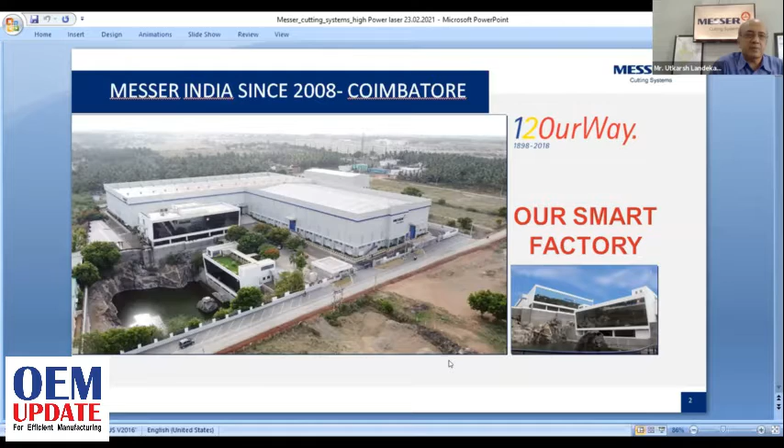So coming back to our initiative of our country, wherein we are talking about being vocal about localization, we are trying to make more and more indigenous content, wherein the key technology still comes from abroad, but it has to be used for local domestic purpose. So going back to the history of laser cutting, they invented the laser in 1970, and thereafter, with various development, in 2018 the fifth generation of machine was launched, and this equipment is one of the fast selling machines for us in India, as well as we are also exporting.

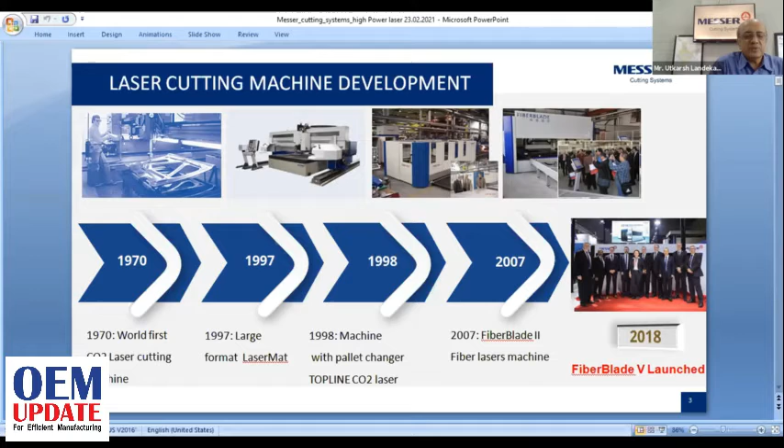So the concept is that when we build a machine for India, we are only talking of a quality machine which is acceptable locally as well as globally. So the local companies which buy this equipment want themselves to be positioned against competing global companies, and these equipments have to adhere to all industrial norms. When I go to the future slides, you'll understand what exactly I mean.

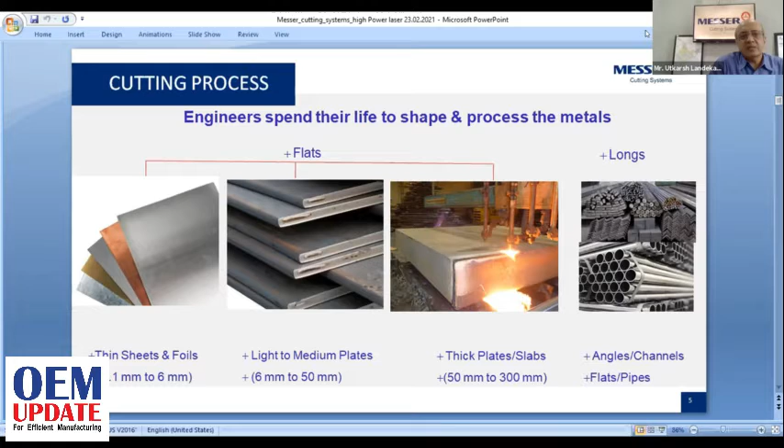Engineers generally spend their full life in shaping the material, and these materials are in two forms which are developed in metals, like flats and longs. Flats means it can be thin sheets, it can be light to medium plate, it can be thicker plate, these can be slabs, angle channels, and they are the long members. So we will be processing this material with laser, gas cutting, and plasma. So the process of laser, plasma, and oxyfuel, they have their own bubble area of operation when it comes to precision as well as the thickness. So this is our universal diagram which we discuss with each of our customers for all the applications.

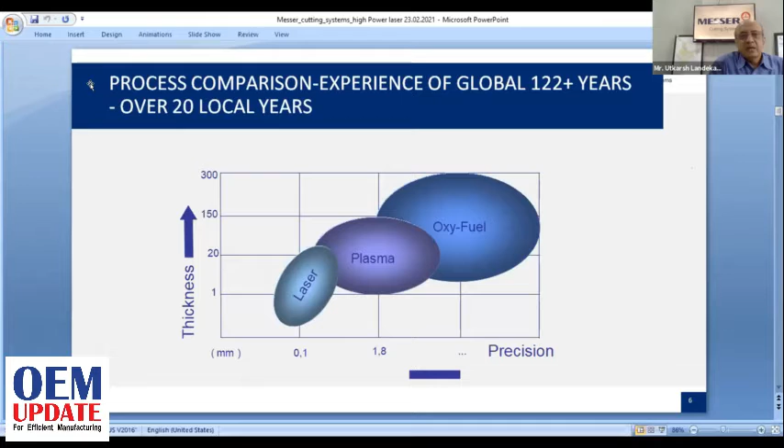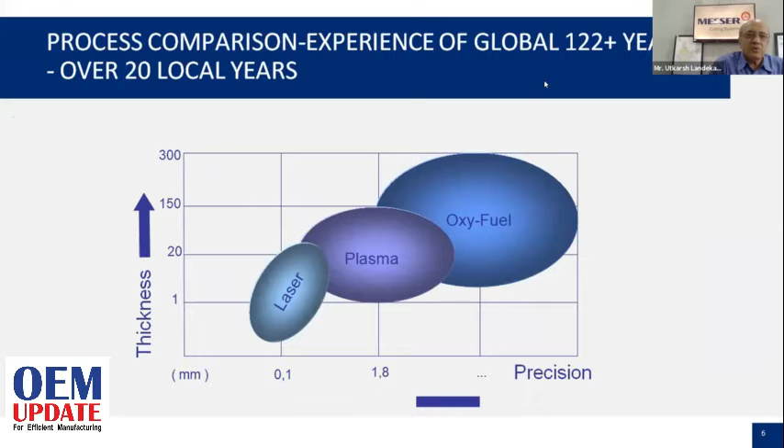So when it comes to the higher precision and material up to 25 millimeter, which has been the predominant area of laser, then it is followed by the lesser precision area of plasma, however the material thickness range goes from 1 millimeter to 150 millimeter, and oxyfuel goes from 6 millimeter until 300 millimeter. So when we look at this bubble diagram, which is a very important diagram, when we go through the application, you will realize the utility of this diagram, and there will be a lot of overlapping area where we have to take a conscious decision that we have to be competitive locally as well as globally with this.

The cutting can be straight cutting for gas cutting, plasma, laser, as well as it can be chamfering. Now globally, when you travel across several countries where the edge preparation or the chamfering is being used for shaping the material as well as welding, all the three processes should be capable of cutting straight as well as beveling.

So in laser also we have developed the bevel, and in plasma our bevels are already being used for several jobs for normal industry as well as defense industry, and they are very handy tools, or you can say they are very productive tools, wherein the reprocessing of the material at various stations can be avoided by adopting these 5-axis tools.

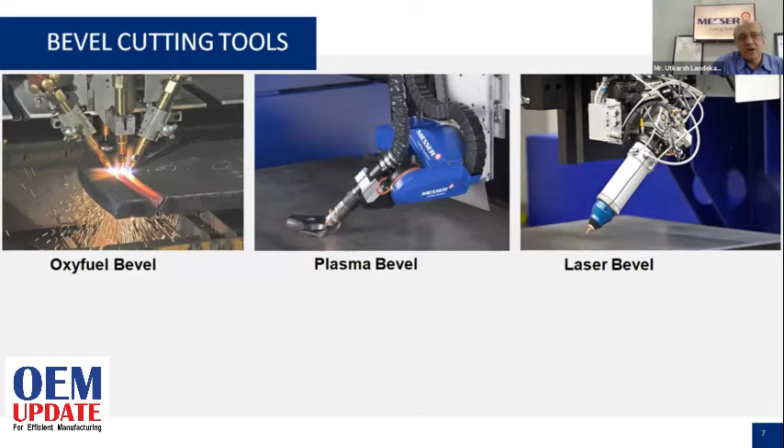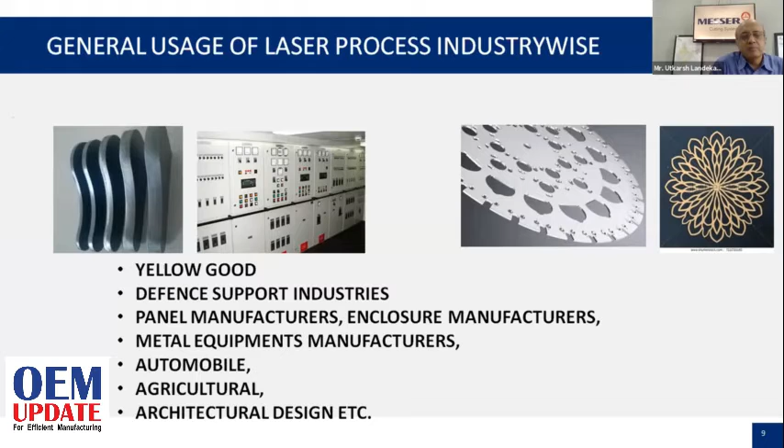So when it comes to laser as an application, these applications are in yellow goods, defense support industries, panel manufacturing, enclosure manufacturing, metal equipment manufacture, automobile, agricultural, architectural design. Now, when we say that we are talking of all the local production for our own use, we need all these equipments to run the show in the industries as well as in the infrastructure segment, as well as all of this what I have highlighted are forming major components which are being used by the defense industry.

So when we become vocal for local, what is important is the machines can be suitable for global materials, global standards, but that may work, may not work in the country. So in our Coimbatore factory, our main endeavor is to work upon the local materials, local steels available, the way the material is available, maybe it is in some particular form, that has to be cut.

The laser cutting machines which are available in the market are mainly coming from the first world countries. They are designed for the first world country material, which are very sophisticated, but in our country they may not be so sophisticated. So we need to tune up the brain, that is a CNC controller, to take out the production in the lowest preparation time, so you don't have to prepare the material ready to get operated on this machine and cut parts out of it.

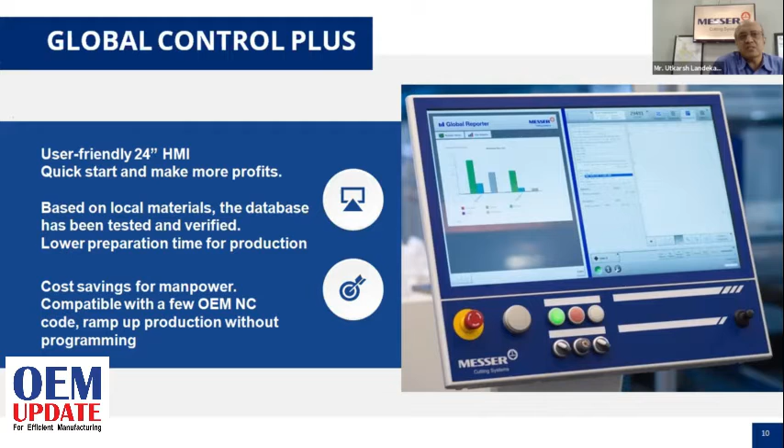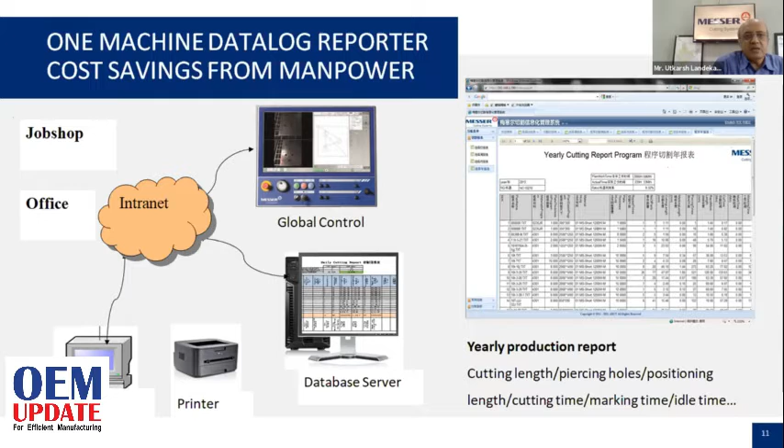Today we are talking of digital India, so cloud based computing. There are systems which are monitoring the equipment, the database is done through cloud computing, and the entire machine production has to be seen from either India, or if it is an MNC company, the data should be available overseas, or if these are Indian companies running their factories in other countries, they should be able to monitor it here. So the equipments, laser cutting equipment, plasma cutting equipment, whatever we are building here are capable of doing this task also. So we want our local internet infrastructure also to support such processes.

Primary sources of gases in India are oxygen, nitrogen, and air, which are being used. Now, there is a typical case wherein, in the COVID situation, the oxygen shortage is there. So we have to tune up the machine to start cutting in air, which is available from a normal compressor, and you can still produce the parts with these available gases.

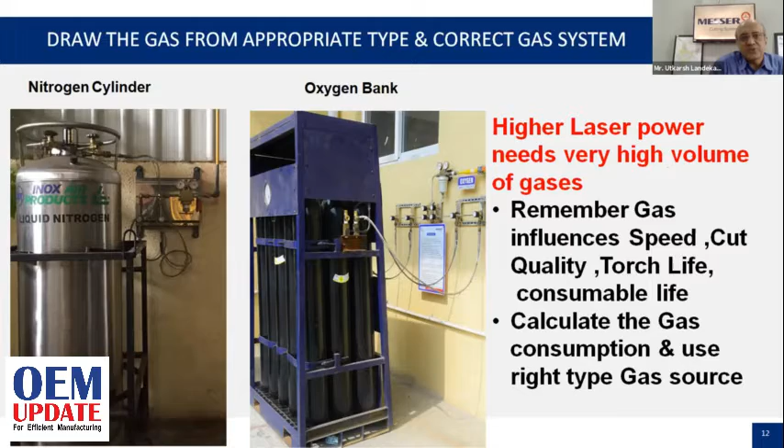So when you cut with higher laser power, you require higher volume of gases, and then you have to be ready to use the local variety of gas, local purities, and local supply shapes. So if you see on the screen, there are two different shapes. It's a cryocan or it is a standard cylinder. So the machine should be capable to adapt with this system. And we have systems to make those gas supply units capable to feed the gases to the machine to produce it.

We also advise our customers to control the cost at various locations. So what can get measured can also get improved. So there are various avenues of saving that can happen. It may be consumable cost, it may be the yield calculation, it can be lower cost of manpower, or it can be capital cost also. So we work with our customers to minimize the cost or optimize the cost and still get the best output.

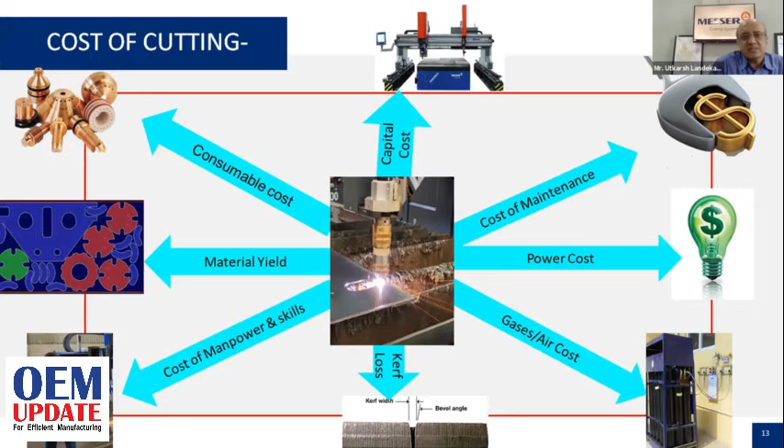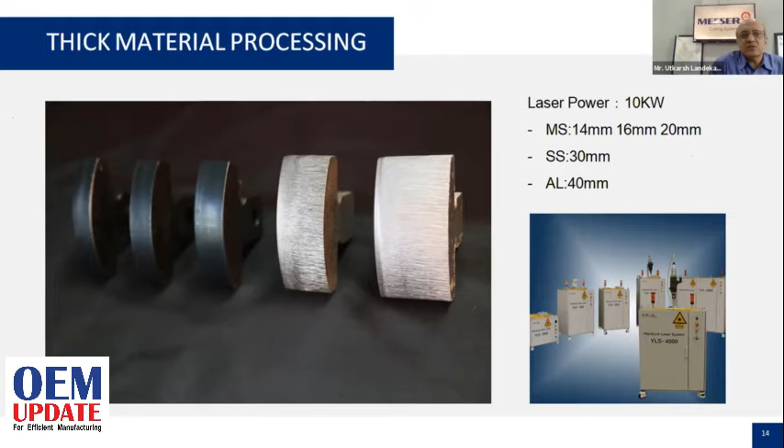Now coming to the thicker metal processing, which has been the predominant area of plasma cutting, gas cutting, or maybe other machining processes like router, milling. So now with the laser power going up and the prices per kilowatt coming down, more and more materials are getting shifted to laser cutting. So what we have seen in the industry, a shearing process, turret punch press, drilling, then milling, and some of the cutting processes are getting shifted to laser cutting. So the components are directly formed from the plate instead of other materials.

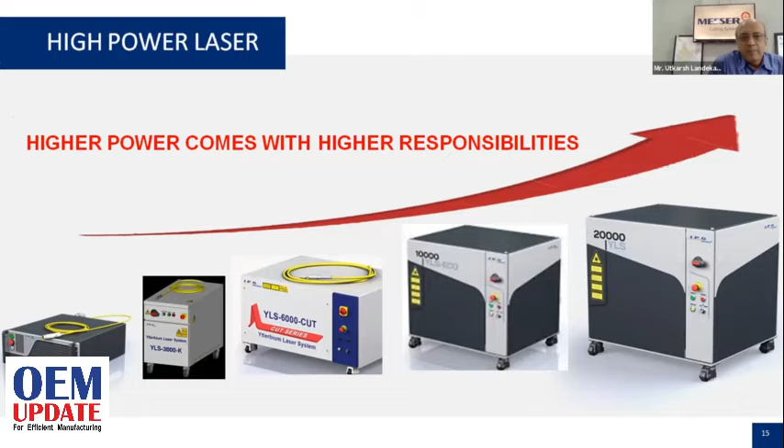With higher laser power comes higher responsibility. So when you have a powerful engine to power your machines, there has to be control, there has to be automation, there has to be the logic to use the higher power with higher responsibility and still support the cutting with bare minimum cost or the lowest cost possible.

Typically, the power ranges between 2 kilowatt and 10 kilowatt, which is used as standard in the industry. We can see the various material thicknesses. We can discuss with our customers offline when it comes to the various thicknesses, applications, and the cut quality. We definitely have possibilities to interact one-to-one, and if there are some questions, you can discuss them in the Q&A, and we can definitely support you with this.

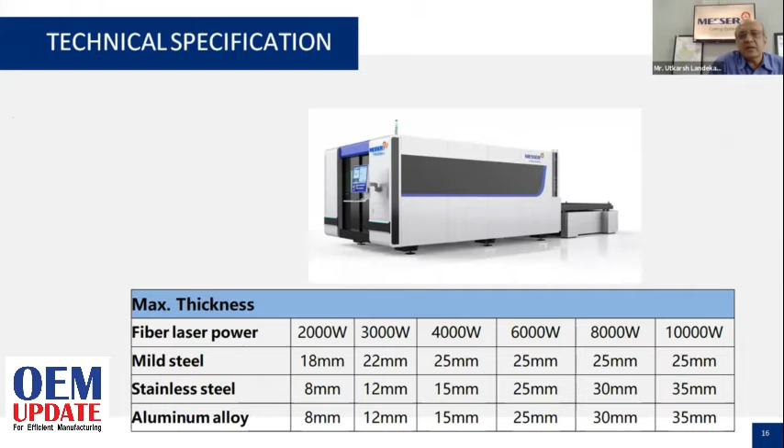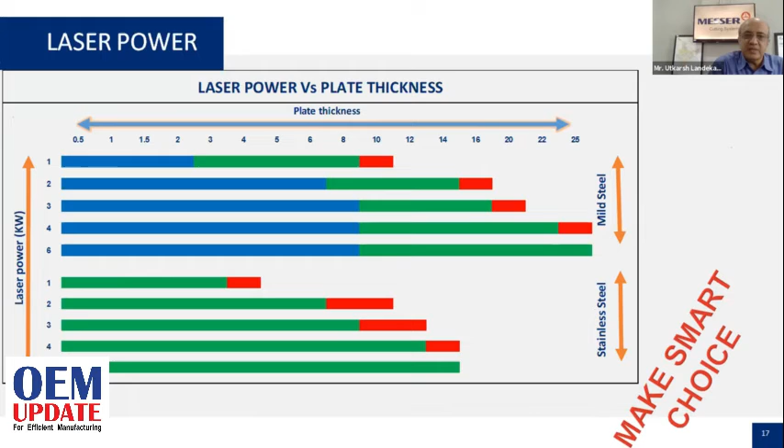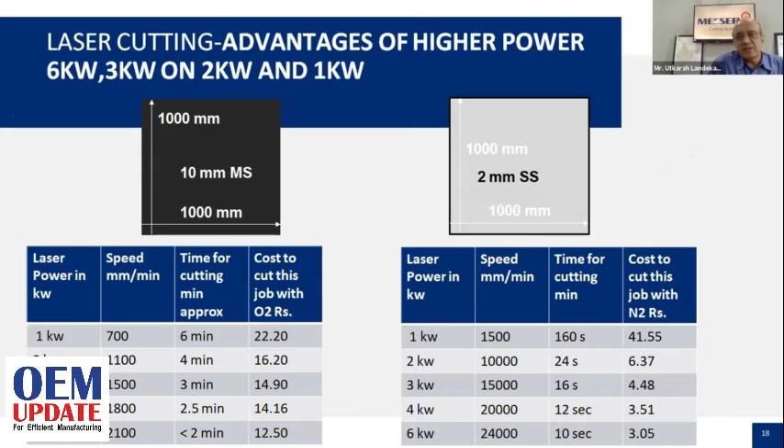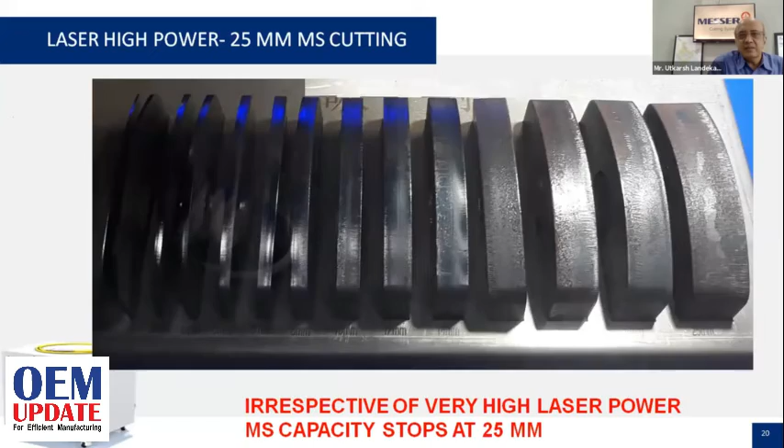So typically when you look at a 1 meter by 1 meter plate being cut, you can see that with the increase of power, the cost goes down in stainless steel and mild steel. Now you can replace some standard applications like simple flange cutting with higher laser power, and the cutting cost will be quite low compared to any other process. Irrespective of the high power, laser has been successful only up to 25 millimeter mild steel. However, it becomes more and more effective in stainless steel, aluminum, and brass.

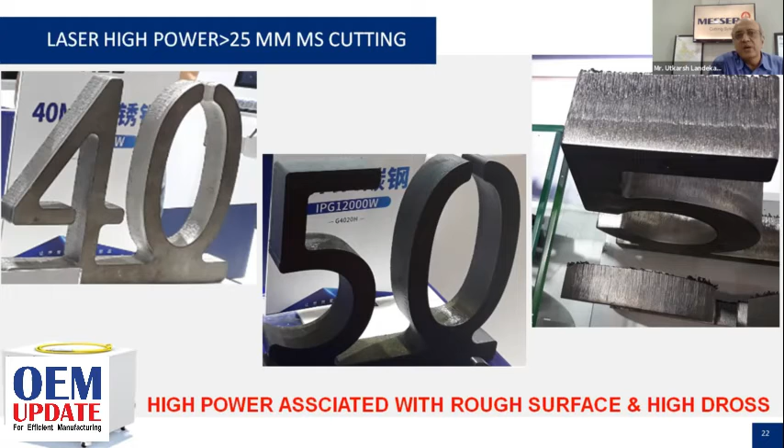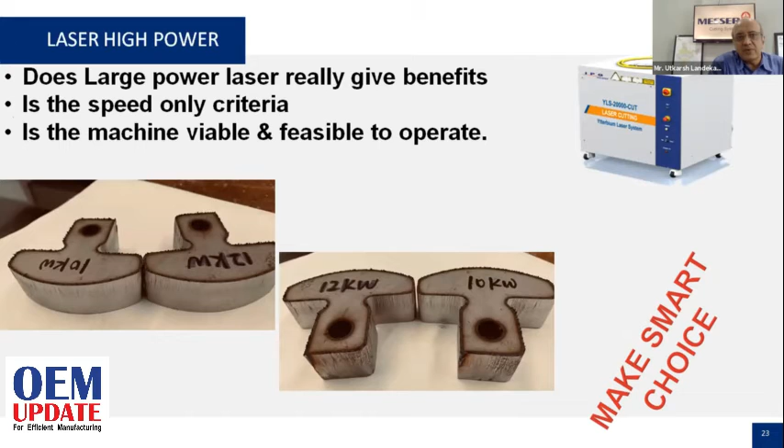Now when we look at aluminum, brass, and mild steel cutting, the surface finish also plays an important role. When the manufactured component is viewed, it also has to look good and be of acceptable quality. Along with the benefits of higher power laser, there are also some limitations which we need to understand, and we can advise our customers on whether they are really useful.

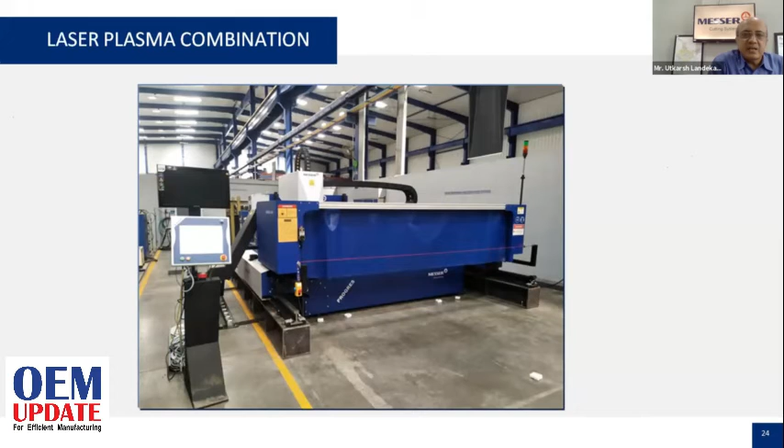So we have combined the laser and plasma cutting machine in this form, and we can use both processes together. In the next slide, you can have a look at one of the practical applications. This is used in firefighting engines, defense trucks, and similar applications. Here you need accurate holes and hole-to-hole center distance, but the outside periphery is not important. So here you can combine the laser and plasma capability.

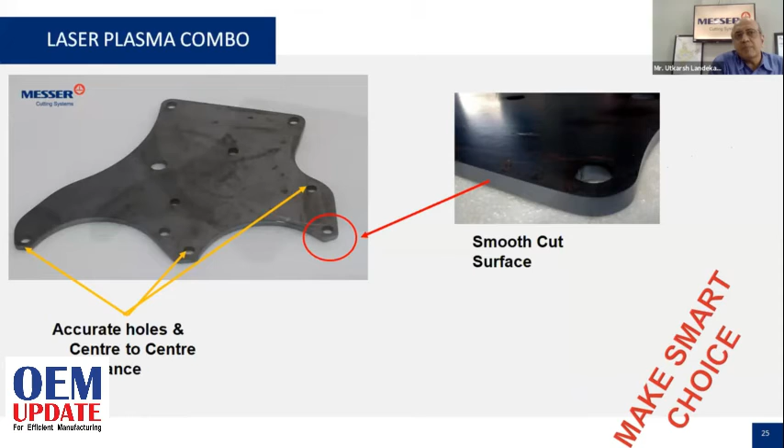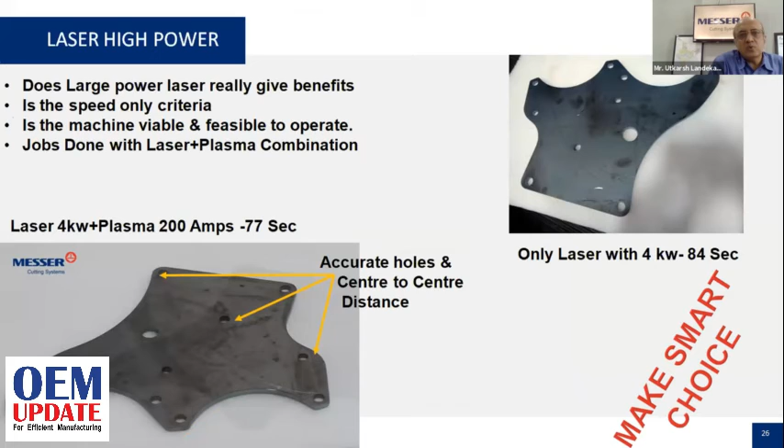When it comes to productivity, just using a laser may not give full output. The plasma can help you reduce the production time and production cost as well. For stainless steel, in certain cases when thicker material is to be cut, plasma can also be used in combination with laser, and this application can look into, let's say, higher surface finish. There are pros and cons to be evaluated, and you can really choose the right process in the combination machine. So we are capable of advising our customers both technically and commercially on which application to use where.

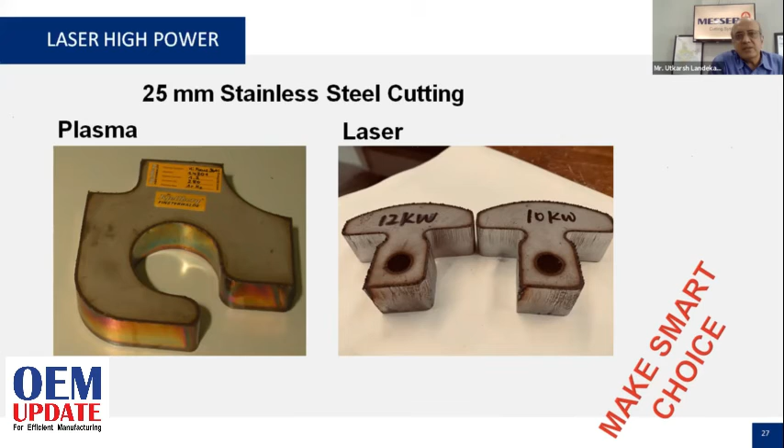These machines can also support IoT, production monitoring, and Industry 4.0, which are global standards and are getting more and more accepted in Indian industries, where you can monitor the machine on your mobile app or a browser, or wherever you are in the world, you can monitor the machine productivity. So we can support our customers.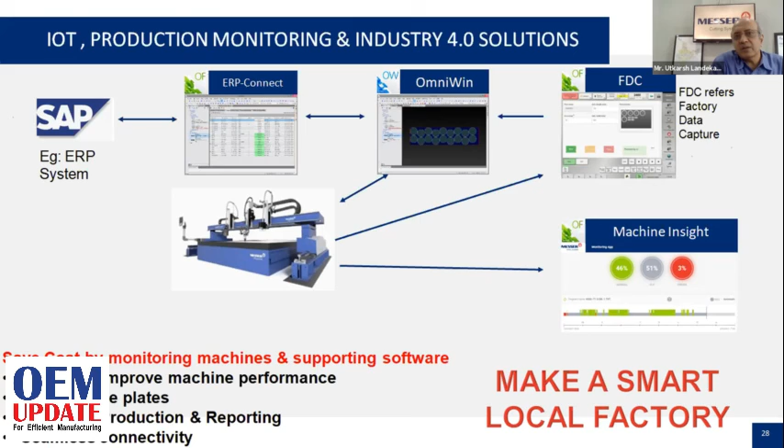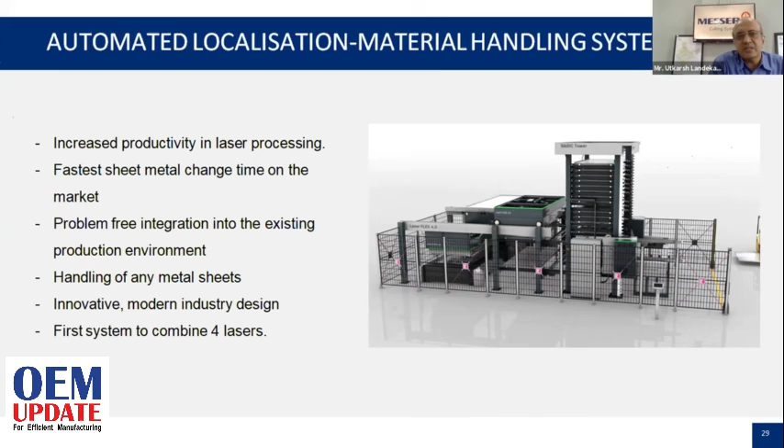When you do laser cutting, there has to be effective material handling for higher production. You have to be competitive in terms of manpower and quick loading and unloading of the material. So we have also developed localized, very high technology material handling systems to support laser cutting as well as plasma cutting. In short, we are supporting local manufacturing to the best of our abilities, with over 1200 machines. We are addressing practically all types of industries, be it defense, normal engineering, or infrastructure industries. We are also getting into air cutting where there are gas shortages, and we support our customers in the future trend of air cutting, oxygen cutting, specialized gas cutting, and a total cutting solution as a package.